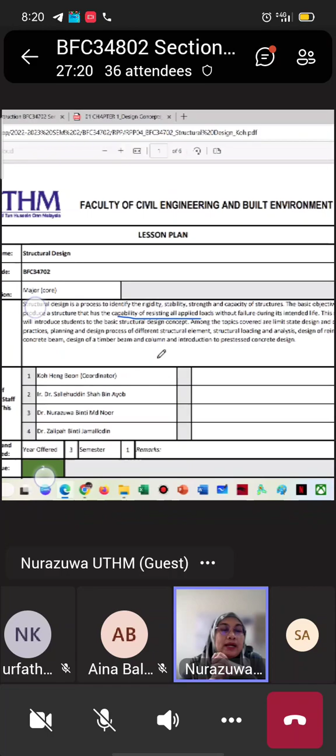Tapi lagi atas lantai, what else? Loads on floor also including finishes, such as tiling, tiles. Tiles itu juga adalah beban di atas slab. Kalau saya sebut slab, semua tahu slab adalah lantai, the floor. Okay, so itu beban mati, sebab tiles tak boleh bergerak ke mana-mana, you tak boleh ubah sebagai penduduk di dalam bangunan tersebut. Okay, so dia beban mati. Apa yang boleh berubah kedudukan itu beban hidup.

Okay, so beban ini - tiling, meja, kursi, makan - semua akan ditanggung oleh lantai, floor. Kemudian beban lantai ini akan diagihkan ke beam, kiri kanan akan ada beam. Beam akan terima beban ini, kemudian beam akan agihkan ke tiang. Ni flow dia, agih ke tiang. Daripada tiang akan bawa beban ini turun ke bawah sebab ada gravity, turun ke foundation. So foundation is the last structure element. Point dia, sebelum beban-beban dari top ini diagihkan to ground, distribute equally to the ground. Okay, itu proses agihan beban.

So setiap struktur dia akan resist apply load. Apply load adalah beban yang dikenakan ke atas struktur, contohnya bermula dengan slab. Every beban starts from slab, level 1, level 2, level 3 ke slab. Kalau roof dia berbeza, roof depends. Kalau you pakai flat roof, dia dari slab. Kalau tak pakai flat roof, beban dia daripada truss, depends on the truss punya peletakan. Dan kat atas tu akan ada torsion berlaku, torsion you belajar dekat mechanics of material.

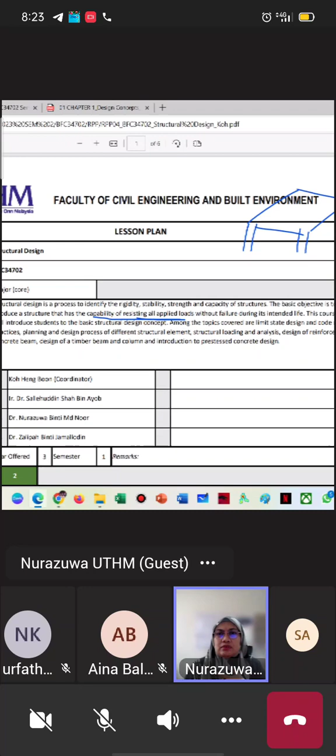Okey, boleh ya. So bila kita ada bangunan, saya lukis. Bangunan kat sini, so ni adalah lantai, floor. So here is the tiang, here is the beam, beam kiri kanan. So loading from slab transferred to this beam, and then transferred to column, and the final point is the foundation at the bottom. Okay, so yang kat sini untuk beam, contohnya for the beam, kalau saya keluarkan kat sini beam, here is the beam.

So this beam, once you apply loading on it, the load comes from the floor, from the brick walls on top of the beam, and also its own self-weight. So it tends to deflect downwards. For a simply supported beam, it tends to deflect downwards, it will fail and crack downwards. Tension will occur, and compression will occur. You already learned this in mechanics of materials - tension and compression.

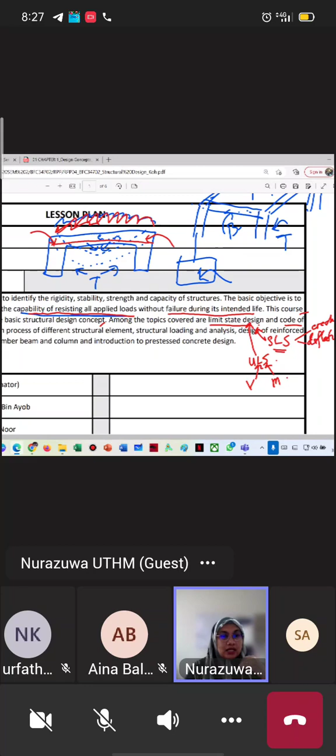And how to conduct the planning and design process of different structural elements. So for planning, we start with the architecture drawing followed by the structure drawing. We stop at the structure drawing only. If the structure drawing is brought to the construction area, it becomes a construction drawing.

So you learn how to calculate the loading and how to analyze this loading, and then you design a concrete beam. For concrete, we have concrete material to build buildings - we have concrete, steel, timber. All this material you learn in Civil Engineering Materials.

What is concrete? Concrete is a combination of water, aggregate and cement. Steel is a ductile material, and this is timber - timber is from natural resources. So for concrete, for a building, we have slab, beam, column.

For a building we have foundation too. But however, for this course we'll cover only beam design. So later for foundation, slab and column, you'll learn these structural elements in Concrete Design next semester. You need to pass this course - if you don't pass, you can't proceed to the next course for designing column, slab and foundation.

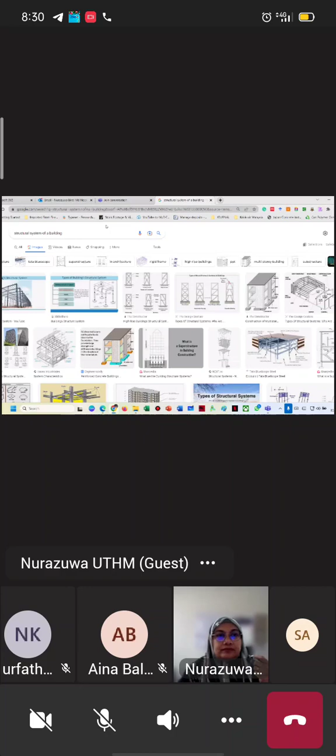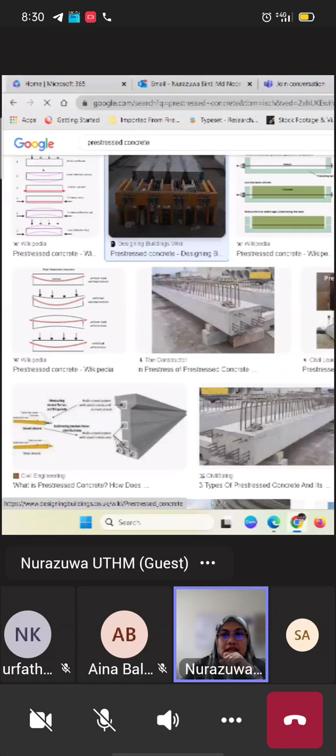Okay, pre-stress concrete yang ada ni dia ada tendon, bar, lepas tu kat ujung dia ada ikat dan dia tarik menggunakan satu alat untuk menegangkan dia. Ada tak sekejap, pre-stress YouTube, you boleh cari ni YouTube macam mana jenis-jenis dia. Tak apalah, nanti kita dah sampai ke tajuk tu kita lihat. Okay, pre-stress.

But for this pre-stress only the introduction, the basic sahaja, apa itu pre-stress? Pre-stress dia punya konsep, basic konsep akan diperkenalkan, tapi design stage tak terlibat. So later if you have interest on this pre-stress concrete design, you can daftar, register dalam pre-stress concrete design for elective course. Boleh, elective course.

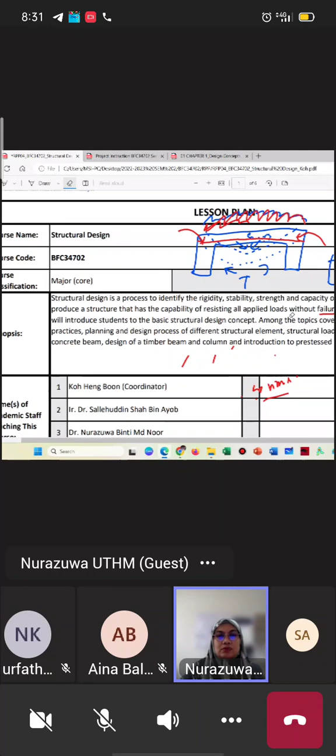Jika ditawarkan lah untuk semester itu, masa you masuk semester tu, sebab elective course selalunya berubah. Itu yang akan lihat untuk semester ini. So basically we have 4 lecturer, 7 section.

Okay, so my name, tak kenalkan diri kang. My name is Nurazuwa binti Muhammad Noor. Please make sure you spell my name correctly in the exam book sheet. Ya, boleh ya, setengah orang tulis salah, bapak saya tak ada, setengah tulis N-U-R-Z-U-W-A, setengah tu Nurazwa, salah heja. Kecil hati saya, sekecil-kecil ya.

Ya, tolonglah ya, so Nurazuwa binti Muhammad Noor. Kena ingat nama cikgu ni penting kan? You all ingat kan cikgu sekolah rendah, sekolah menengah yang you all masih ingat kan? Saya ingat jugalah nama saya kan, kita baru jumpa beberapa minit kan.

Okay, ingat. Alright, so kita dan Mr. Koh is course coordinator. For this section, I share this section with Ir. Dr. Sallehuddin. So after week 8, Dr. Sallehuddin akan ambil alih lah. Saya ambil half term, dia ambil half term ya. Saya maklumkan, so for this course, saya combine dengan Dr. Sallehuddin, boleh faham? Okay, credit value for this course is 2.

Okay, there are 3 CLO. CLO1 is the cognitive part. Cognitive part tu kita punya otak, ilmu kita, pemikiran kita, knowledge kita. So kita punya taxonomy level up to C5, di mana pelajar at this level, year 2 semester 2, we hope that you can understand, you have the knowledge, okay, you can analyze. Yang kelima saya lupa lah.

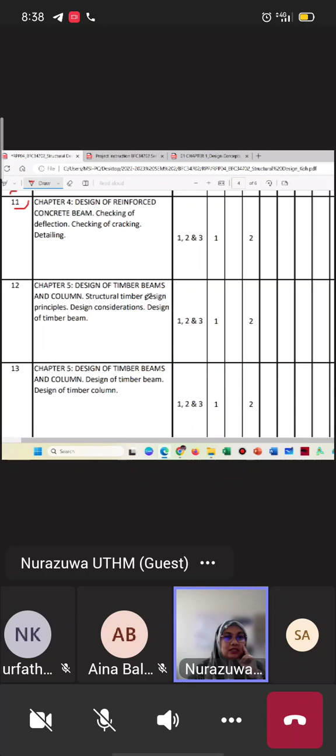Then for chapter 5 is the beams and column timber design. Timber sebenarnya agak senang, sangat senang sebenarnya. You just play around with the table, everything is given. Dia punya rumus tu ada melibatkan pemfaktoran K1, K2, K3, almost K dia nilai dia equal to 1, depends on the types of the timber also.

And the final chapter, the last chapter, is on pre-stress, just focusing on the introduction, the advantages. There are two types of pre-stress, post and pre-tension. Dia tak melibatkan pengiraan. So there are 6 chapters under this course.

Then this is the assessment, continuous assessment, quizzes. There are 2 quiz, each quiz 2.5%. Assignment, 2 assignment, each assignment 2.5%, test 20%, and also project.

Siapa tahu test bila? Bila test? 17 Mei. 17 Mei, okay good. 17 Mei dekat dalam group description dah ada 17 Mei.

Please log this date, 8 to 10 AM. PM jangan, AM jangan, datang pagi. Dari tempat F2 bawah, ground floor. Kalau British UK dia panggil ground floor yang tingkat bawah tu, kalau American dia panggil first floor yang tingkat bawah tu. Kita guna UK sebab kita guna Eurocode. Ground floor, boleh please log this date.

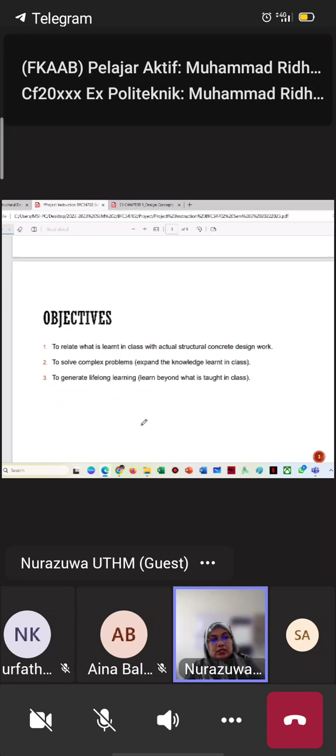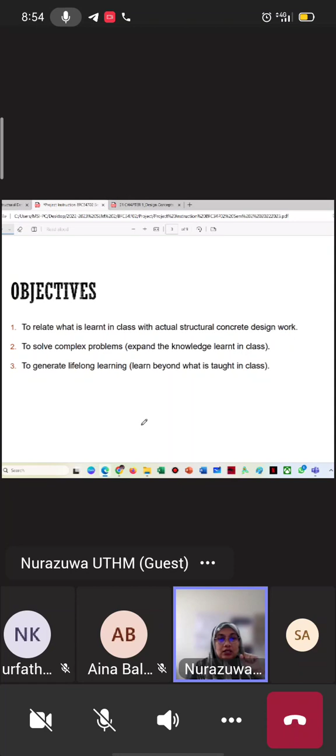You will be interviewed by Dr. Salahuddin, I won't take the time now. So you need to prepare the final project report and also presentation. The project objective is to relate what is learned in class to actual structural concrete design work, to solve complex problems, to generate lifelong learning.

So your group is assigned to conduct the detailed design for reinforced concrete beams only. This project doesn't involve timber, timber beam or column, not included. We focus only on the concrete beams.

So you need to design a reinforced concrete beam from an architecture drawing. Analysis of the architecture drawing plan must be conducted to identify the dimension of the building, location of the column, position of the beam, slab, and so on. After defining the structure component, you have to produce engineering details, and so on.

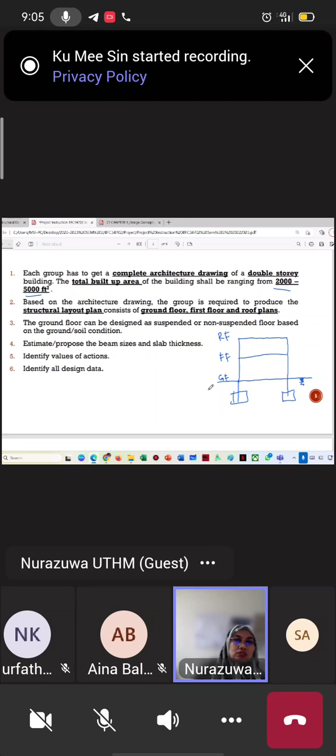If the soil is strong enough, you want to use suspended or non-suspended, for example. Then estimate and propose the beam size as you proceed with the design stage.

Identify the action and also identify all the design data, like concrete strength.

Concrete density, basically we take 25 kilonewton per meter cube. This 25 is for concrete with reinforcement. For plain concrete, it's 24.

Then we have steel strength, yield strength. Basically we take 500 Newton per millimeter square.

There's also identifying the design nominal cover. Why the nominal cover is needed, I'll explain later. So this is the specific task.

Then each group member, for each student, you need to design one continuous beam and one simply supported beam. Each member must do this, so in one report there will be 4 continuous beams and 4 simply supported beams.

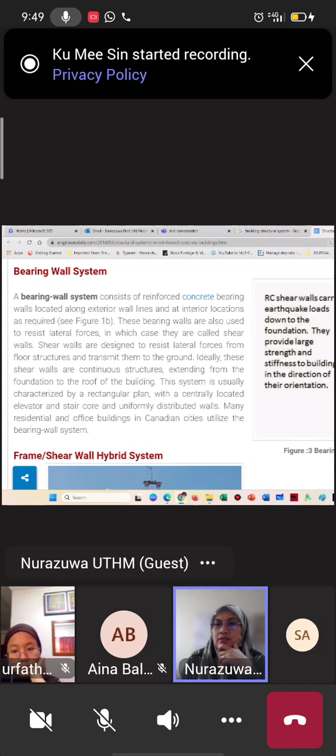Okay, there's a slab, there's a beam. Then there is a column. We have slab, beam, and also foundation. So this is the basic structure element in building system, the building structure system. Okay, this is basic.

So for the high-rise building, there is additional retaining structure, for example the shear wall, which can withstand any sway due to horizontal load. Horizontal loads, for example, come from wind loads. For high-rise buildings, 5-story and above, you need to consider the wind action. So for high-rise buildings we provide shear wall as one example to resist any horizontal load.

Other than this, there is also bracing system and everything. But for the basic structure element in the building system, it consists of column, slab, beam, and foundation. Foundation is the last structure element before all the top loading is distributed to the ground.

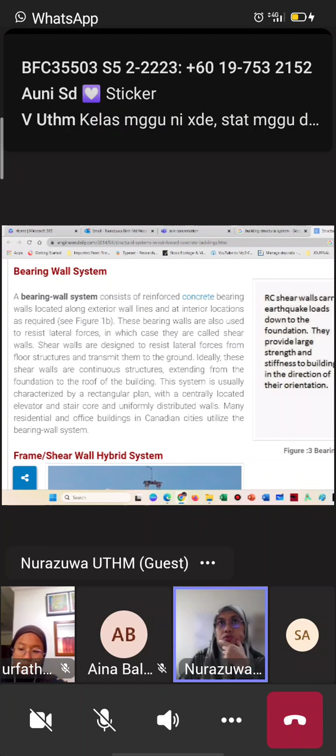That's the types of foundation. There are many types of foundation. You will learn it in reinforced concrete design next semester, there are many types. So this is the building structure system.

So for one building, it consists of the structure system. Infrastructure, like your house, must have an access road. Then for the structure system, inside your house there must be a beam. Without a beam, there can't be a slab. Without a column, there can't be beam and slab. Without foundation, it's a problem to distribute your top loading to the ground. Of course there is also the M&E system, plumbing and everything, and also security system, like your gate. So structure system is a system that holds the components together.

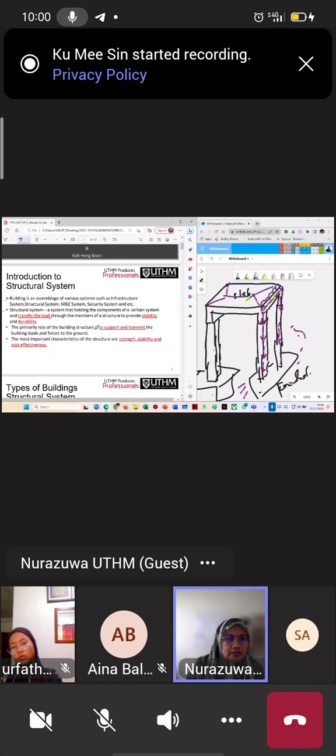Understand? Okay, so then the beam reinforcement is connected with the column reinforcement, you tie it together, so then you can transfer loads to the column. And the reinforcement is attached with the foundation reinforcement, so that you can transfer loads from column to foundation. So this is how to transfer loads from slab, from the top to the ground.

So that is how you transfer the load through the members of a structure to provide stability and durability. So in design, you must consider the stability. Stability cannot be calculated. Stability depends on your decision as an engineer, based on your experience. To design a building, you shouldn't put a roller support everywhere.

You allow one movement in one direction, maybe in horizontal direction, like a roller support. Do you want to twist it and so on? Usually for a building, we assign pin support or fixed support only. Sometimes in analysis we make an assumption of pin. It depends on the connection, how you arrange the reinforcement bar inside.

That will decide whether that connection is a pin connection or a fixed connection. Okay, so you provide the stability and durability. What is the meaning of durability? Durability is ketahanlasakan, how strong your structure is to the environment around the building, the surroundings.

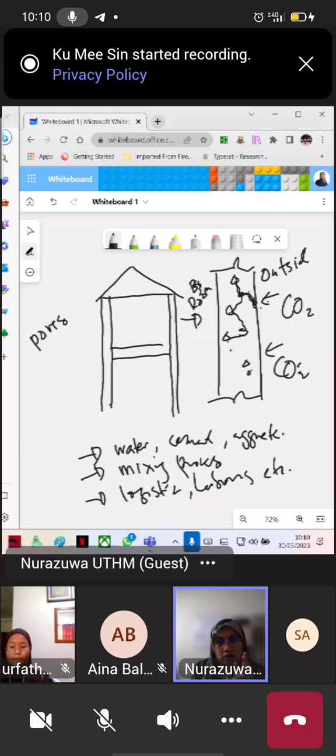So it goes traveling through. This process will take time, maybe 2 years, 3 years, 4 years, 20 years, 50 years, 10 years. So it goes, it attacks. But if the concrete is plain concrete without reinforcement, it is okay.

But if the concrete has reinforcement, you'll have a problem there. Because a good concrete should have pH more than 12, very high alkali - more than 12.

So because if it's more than 12, let's say there's reinforcement - this is the bar, the reinforcement. As long as the concrete has pH more than 12, this reinforcement bar has a passive layer on top of it, surrounding the bar there is a passive layer.

This passive layer is active as long as the concrete pH is more than 12. However, this pH can reduce when carbon dioxide starts to enter the concrete. When carbon dioxide enters the concrete, pH starts to reduce from 12 to less than 12, and it keeps reducing until a certain period, until it reaches the steel reinforcement.

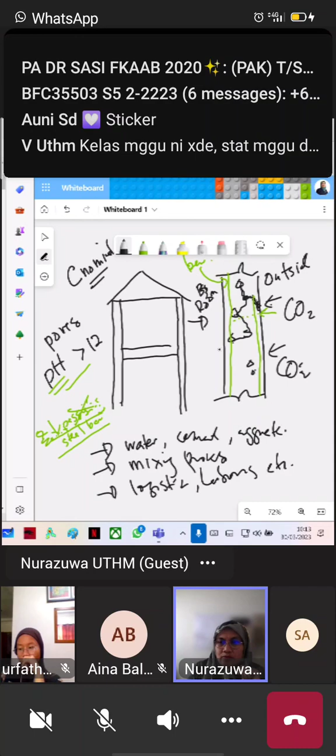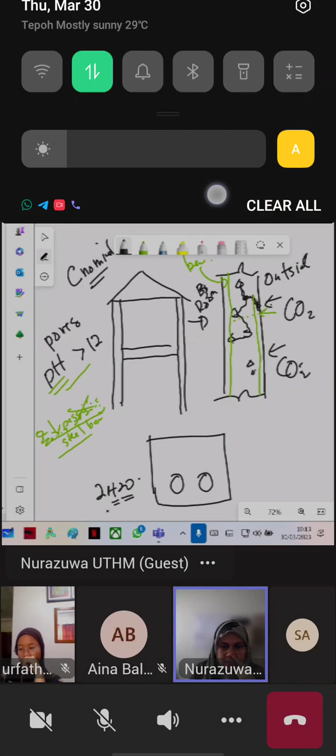Okay, so this is my cross section, beam cross section. This is the reinforcement bar, 2H20 for example. This is the diameter of the bar, this is the strength of the bar, and this is the number of bars, 1, 2. So here we call this C nominal.

This C nominal is the distance from the outer surface to the bar. It is known as C nominal.

This C nominal is determined based on three factors: fire resistance, bond of the reinforcement bar, and durability. So you need to provide adequate C, the cover, to make sure that the location of this bar is adequate enough.

Along its service life, if you design a building for 50 years, for 50 years the reinforcement remains in a safe condition. The pH is still okay, the passive layer is still okay, so it will sustain for 50 years. This is what you'll find later with Dr. Salahuddin - this is the importance of durability.

To make sure you achieve good durability for a building, you need to prepare a good concrete, in terms of material preparation, batching process, logistic process - everything must be superb, so you can produce a very good concrete.

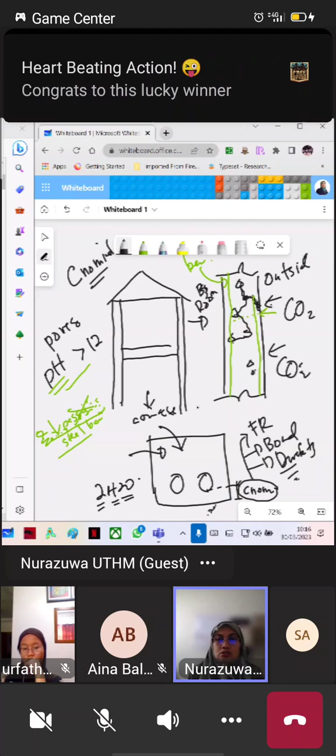Understand? So from this discussion, we can conclude that the design process you learn in this course must tie together with the civil engineering material you learned previously.

You learned mix design in civil engineering, right? So you must know that a good concrete combined with a good design can produce a stable and also durable building. That's very important. That's why in the design process we consider durability.

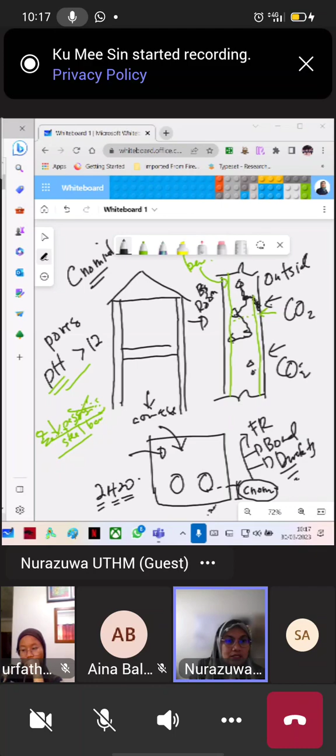If you consider durability, for concrete there are two aspects: durability and also strength. But between these two parameters, the important one is durability. If the building is durable enough, very good and resistant against the environment surrounding it, that means the strength is also good - good durability means good strength.

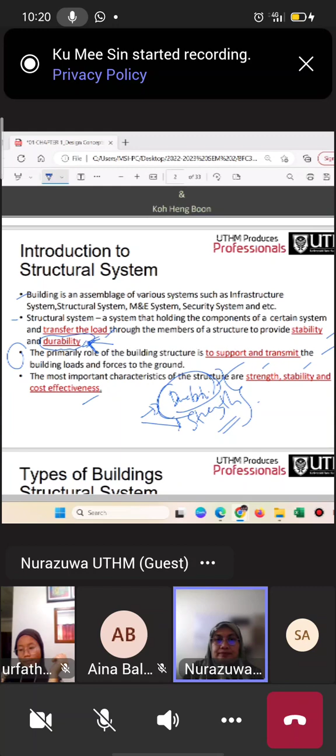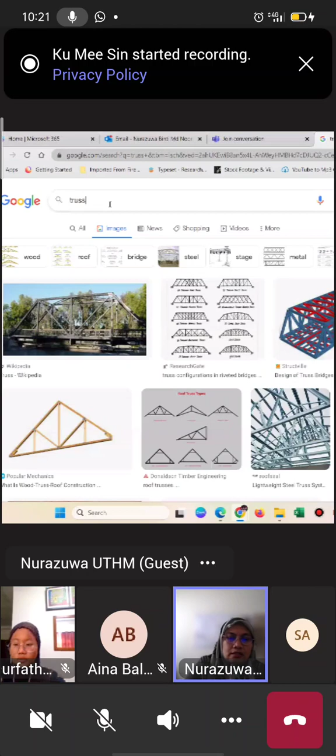Now the truss - we cannot see it clearly here. This is the truss. So we can see the truss in this building, trussing system.

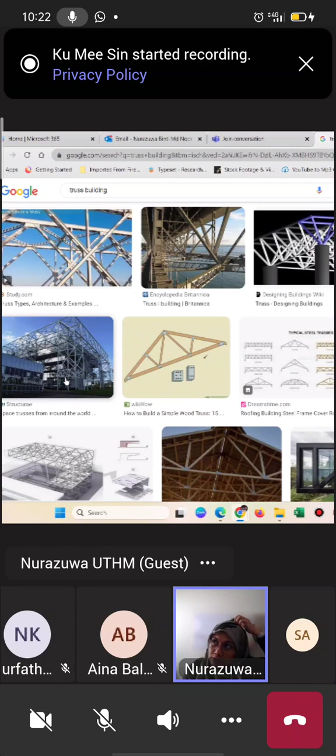For the truss system, if we go back to the mechanics of materials from an early chapter, you learned about normal force, compression, and tension. Tension and compression force is applied in the truss system - it only has compression and tension force, no bending, because during design and construction we assume the purlins are located at the joint, so it doesn't get loaded in the middle of the span. There is no bending.

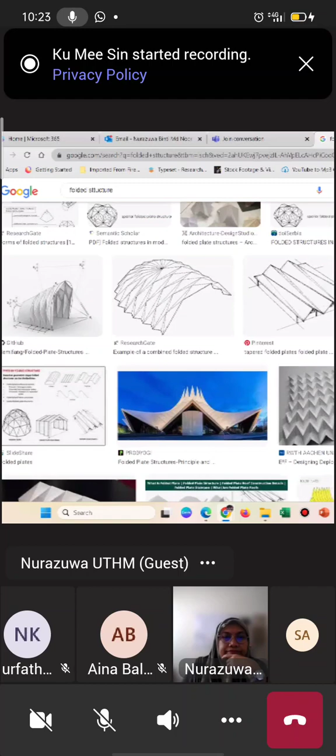Okay, shell system - we have domes and folded shell. Domes are like at a stadium. Domes, folded structure. This is a shell structure.

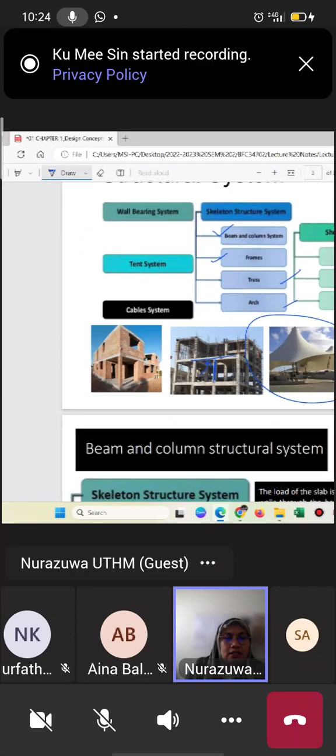Then this is the skeleton, I already explained. This is about load transfer - from the slab it transfers to the beam. So here is the beam, and loads from the beam transfer to the column and then transfer to the foundation. This is repeating information, and this is the cable system.

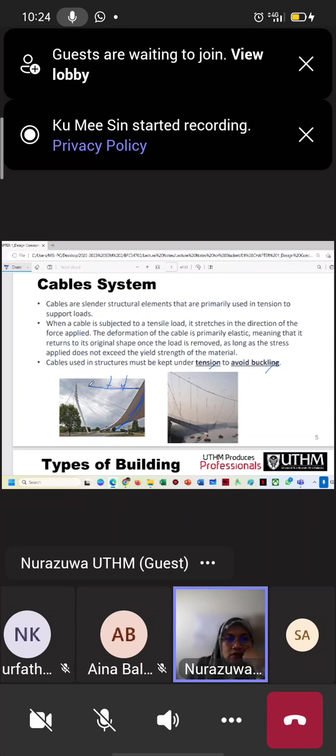Cable system is kept under tension to avoid buckling. This is the structure here - if there is no cable, this structure will buckle. Buckling will happen, so you provide this cable to provide tension force. The loading from here will go to here, to the support. The column support will bring the loading downwards, then go to the foundation inside the ground. So this is the cable.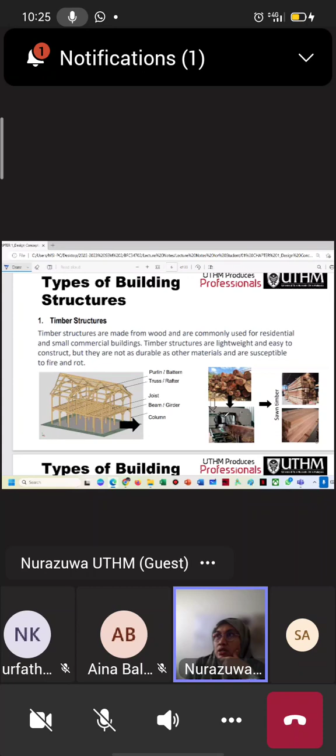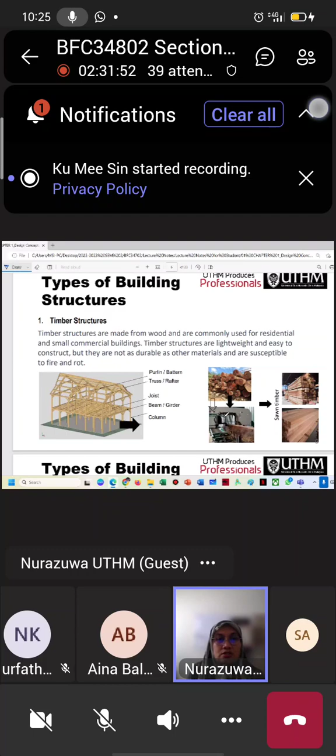So for types of building structure, we have a few materials as you learn in civil engineering. This example is timber structure - timber is a natural resource, made from wood. We categorize timber into several categories: hardwood, softwood, heavy wood, and one more I forgot. Timber made from wood is commonly used for residential and small commercial buildings.

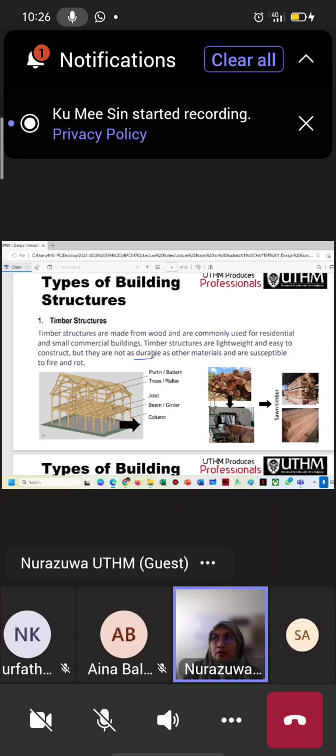Timber structures are lightweight - we have lightweight timber and heavy wood timber, one more I forgot. Easy to construct, but they are not as durable as other materials and are susceptible - not durable because why? Not fire resistant, it easily catches fire, so it's not durable. But in terms of attack from chemicals like carbon dioxide, it doesn't have much effect.

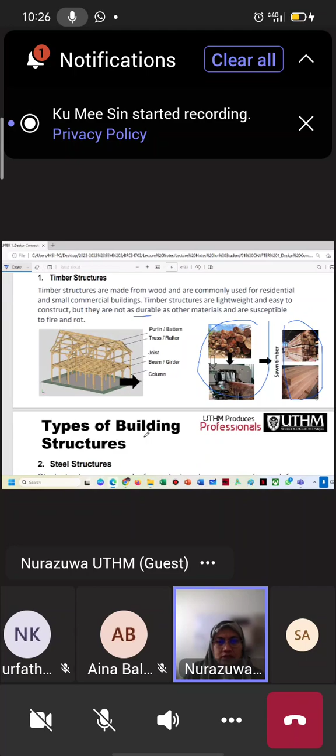Alright, so this is the raw timber, then this is the sawn, after the process. The second material is steel structure, made from steel. Steel is ductile and strong enough, durable, and can be prefabricated for easy construction.

Fast construction, even though it costs more compared to concrete and timber. Timber is expensive now. But if we look at the overall benefit for the long term, steel structure can be one option. However, they can be expensive to build and require certain considerations.

There are a number of inherent characteristics, and there are two groups under steel structure. The first one is hot rolled, which is made for beams and columns. The other group is cold formed, which is used for the truss system.

So this is the steel. We have hot rolled here, we use it for columns. This is the I shape - really looks like an I, right? So the I shape can be used either for the beam or for the column.

And here is the truss framing. For the truss we use cold form, since it's easier to form. Cold form comes in C shape, Z shape, and L shape, which we use for purlins. This is an example of the cross section for the hot roll section.

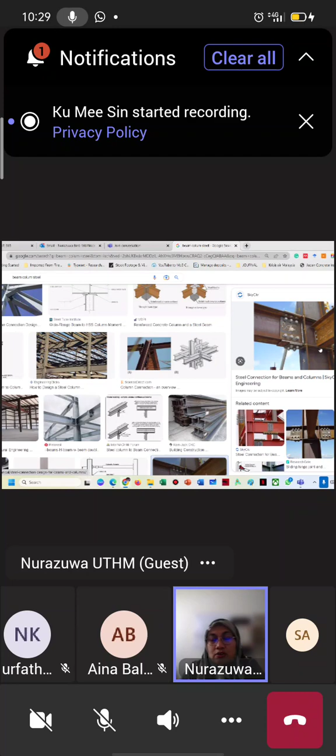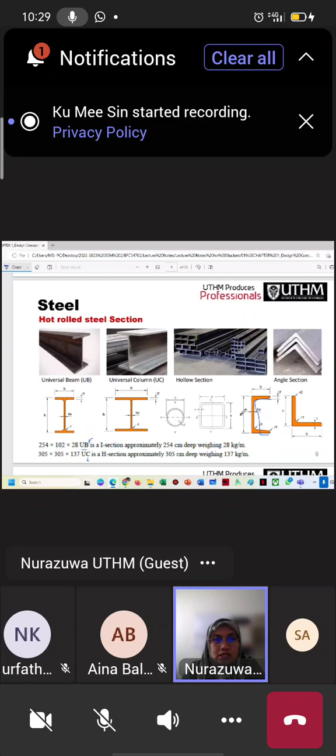But I will not go into detail for this steel design - you will learn it later in steel design. So this is the stress and strain relationship for steel.

You have learned this relationship and how to read this diagram in mechanics of materials. It starts with the elastic limit up to the plastic, and then the ultimate before it fails. The stress and strain are actually not directly related - it is a separate behavior, but we use Hooke's law.

When you use Hooke's law, we can combine and relate the stress and strain. But basically stress and strain are different behaviors - they are not connected to each other, but we connect them using Hooke's law. This is the table you can use later in steel design.

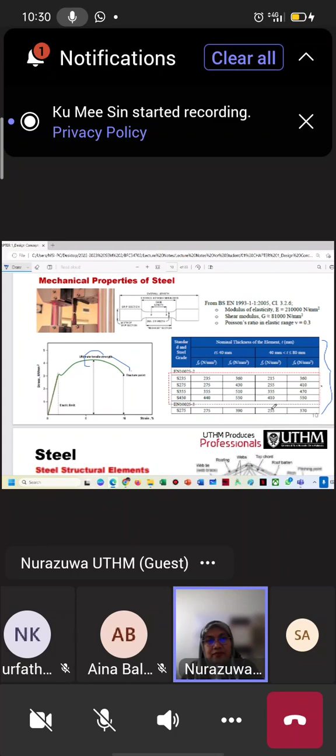So this is the steel structure element. Basically it is similar to the concrete structure - slab, column, beam, and foundation. There's also a base, using concrete. The slab is concrete, and the column and beam are steel reinforcement. This is called composite structure - meaning combining two different materials, in this case concrete and steel.

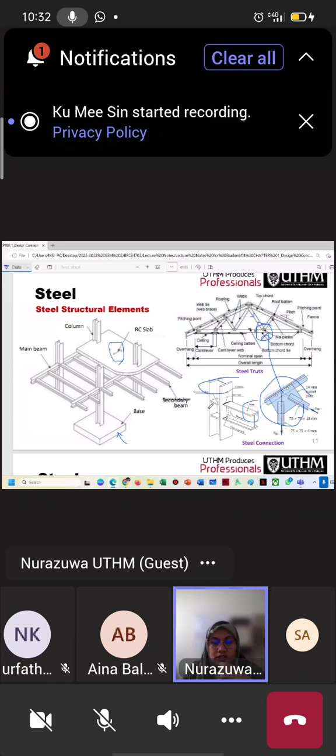So this is the truss system, which you will learn in steel design. This is how we connect the beam with the column, the connection for the steel truss here. The truss only has tension and compression force, while for the beam there is only shear and moment behavior.